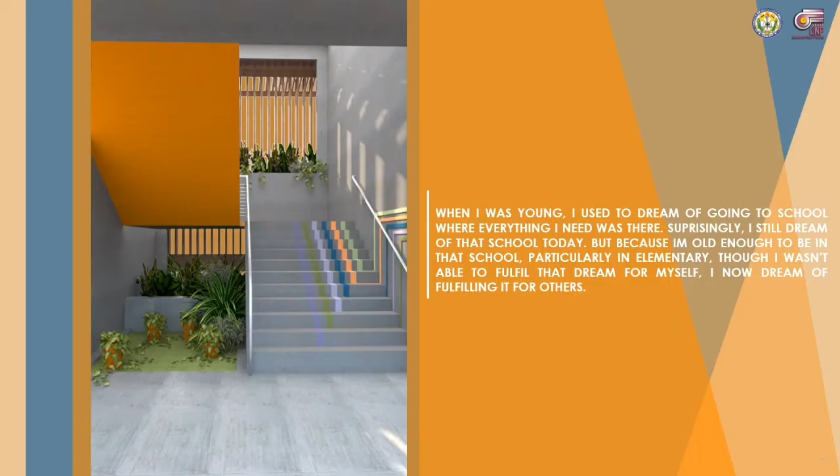When I was young, I used to dream of going to school where everything I need was there. Surprisingly, I still dream of that school today. But because I'm old enough to be in that school, particularly elementary, though I wasn't able to fulfill the dream for myself, I now dream of fulfilling it for others.

These days, it is very alarming to hear a kid saying that he doesn't want to go to school anymore. Maybe the kid has a bad experience of going to school, or maybe he doesn't want the school itself because of its poor design. This is where design consideration must be applied, because building structures has a great impact on its users.

The problem is, the municipality of Santa Maria together with the principal head of the DepEd Santa Maria have given us their concerns about the design of elementary schools in the said town. One of which is that none of the schools in the town offers a class for SPED students.

Another concern is that one of the most active and well-performing schools, the Santa Maria East Central School, will soon be relocated to a new place because the current location of the school is part of the Santa Maria Church where the Twin Chapel can be seen, which is owned by UNESCO. The UNESCO property will be renovated and reconstructed, as it will become a museum. This will be a big challenge because they will be the ones who are going to give the relocation site.

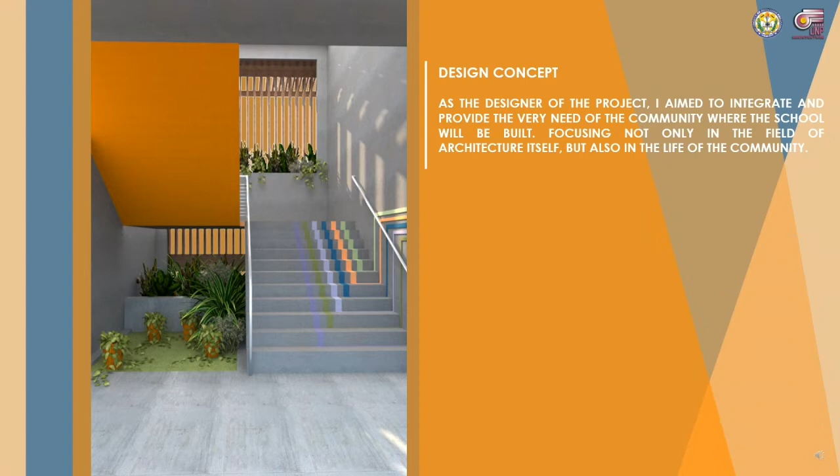class. As a designer, we should be creative and innovative, taking into consideration all the possible laws that govern the site and the future users. As a designer of the project, I aim to integrate and provide for the very needs of the community where the school will be built, focusing not only on architecture itself, but also on the life of the community.

Project objectives are well-facilitated school programs and activities, also social involvement. My design goals are to provide an idea for the future of Philippine school design, introducing the importance of farming in our community with the help of architectural solutions.

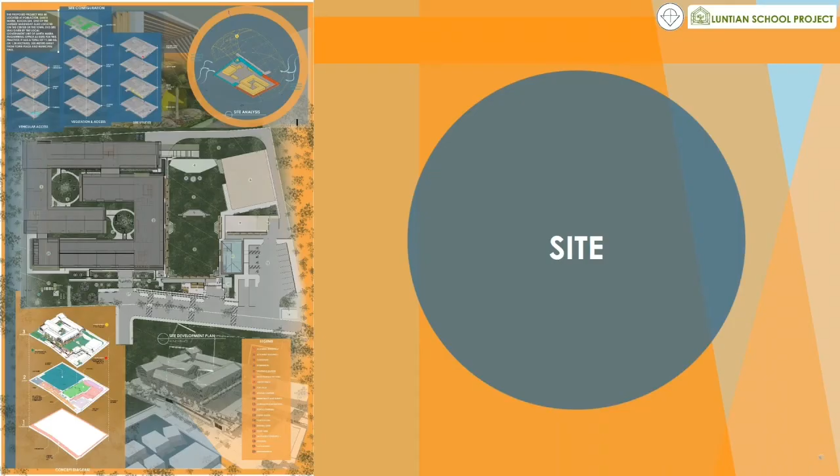Project Site. Let's start from understanding the site through site analysis. This shows the site analysis in isometric form, massing and prevailing winds. The northeast and southwest monsoon are also presented on the board.

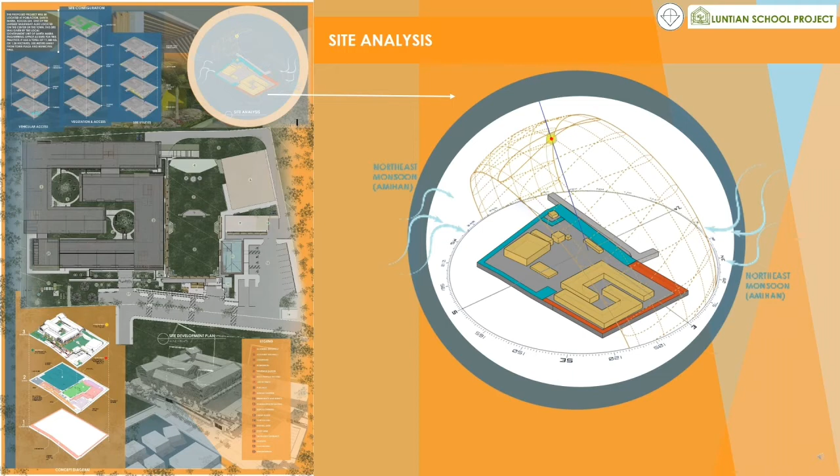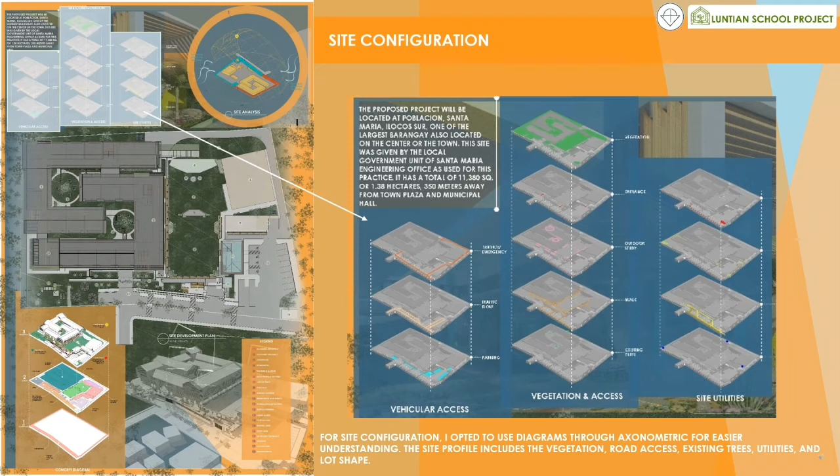Next we have the site configurations. I opted to use diagrams through axonometric for easier understanding. These show the site behavior and their properties such as the traffic flow, the existing and future vegetation, project utilities and lot shape, etc. And next we have the concept diagram for the site.

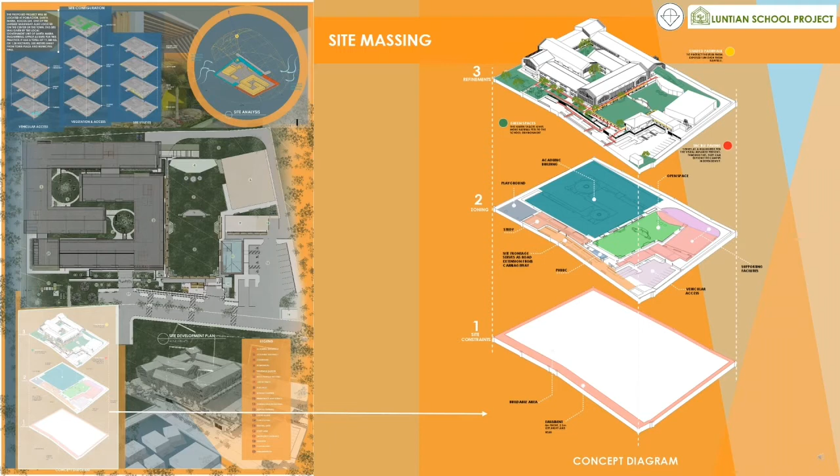First, it shows the site easements. Next, we have the zoning related to every activity of the project. And last, we have the massing diagram together with other users' considerations.

And now, let's discuss a bit of the site development plan. You may check the attached PDF file for a more detailed view.

We have the school entrance. Behind it is the waiting area for students and parents. The flagpole area as the center of the project, and the administration building. Then we have other school facilities: playground, kiosk, and study park.

And especially we have the academic buildings. In the middle of it is a courtyard that serves as the center part for both buildings. And lastly, we have the farm to school garden.

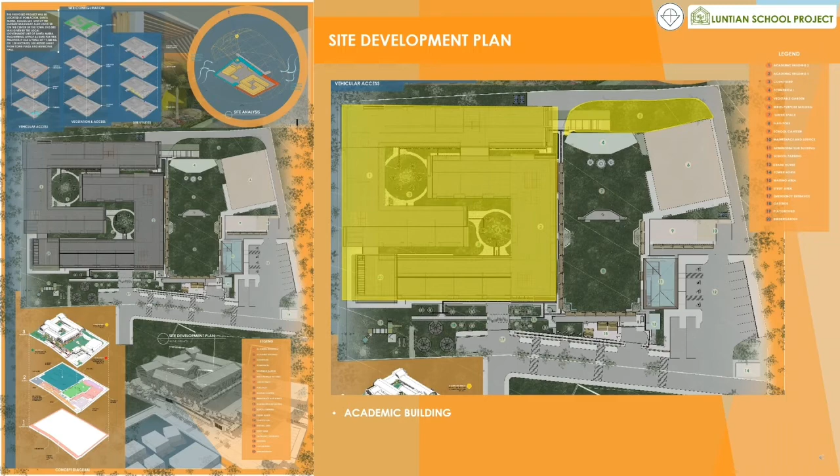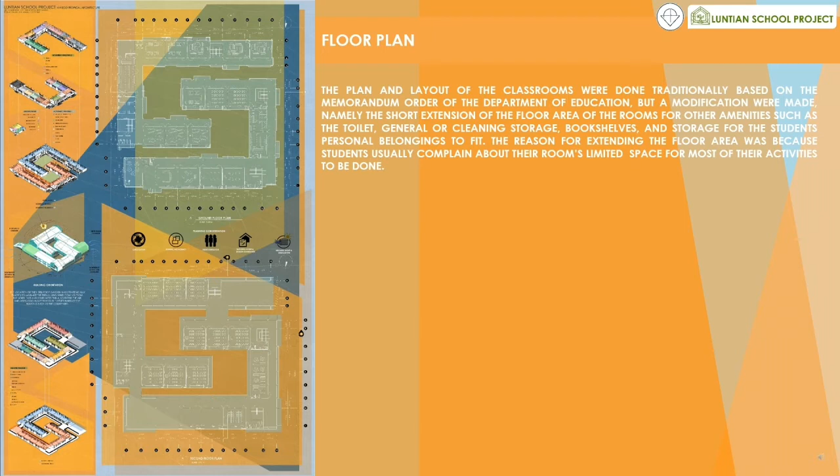Floor plan. The plan and layout of the classrooms were done traditionally based on the memorandum order of the Department of Education, but modifications were made, namely the short extension of the floor area of the rooms for other amenities such as the toilet, general or cleaning storage, bookshelves, and storage for the students' personal belongings to fit. The reason for extending the floor area was because students usually complained about their rooms' limited space for most of their activities to be done.

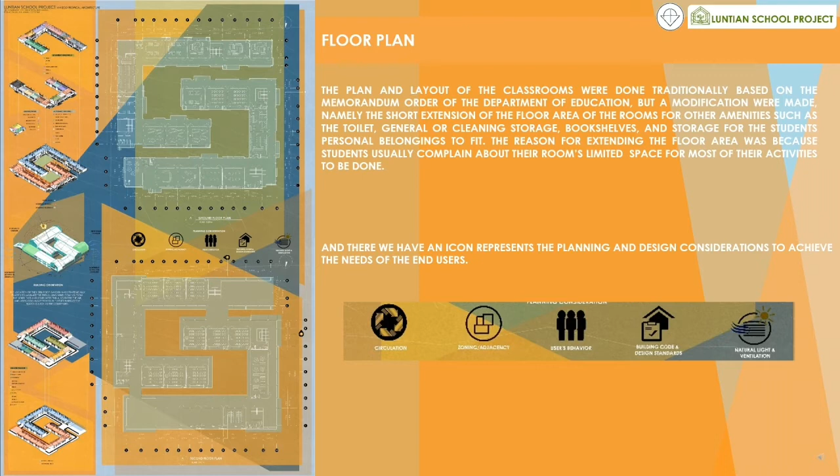And there we have an icon that represents the planning and design considerations to achieve the needs of the end users. And this is the ground floor plan. We can check the labels by referring to this axonometric diagram. This kind of diagram was made for all the parts to be shown in a more detailed presentation.

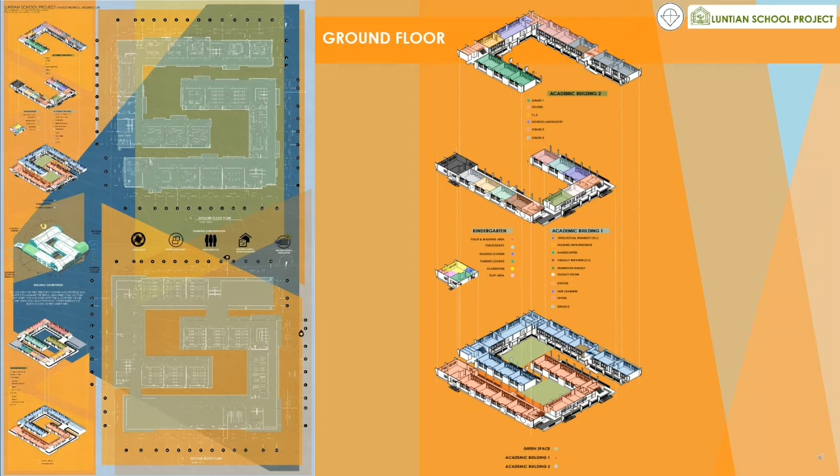The building comprises mainly of the rooms for special education, and the second building is composed of lower grade levels from first grade to third grade.

And here in the second floor, the first building mainly comprises of the learning resource subjects like computer lab, music and art room, library, etc. The second building is composed of higher grade levels from 4th grade to 6th grade.

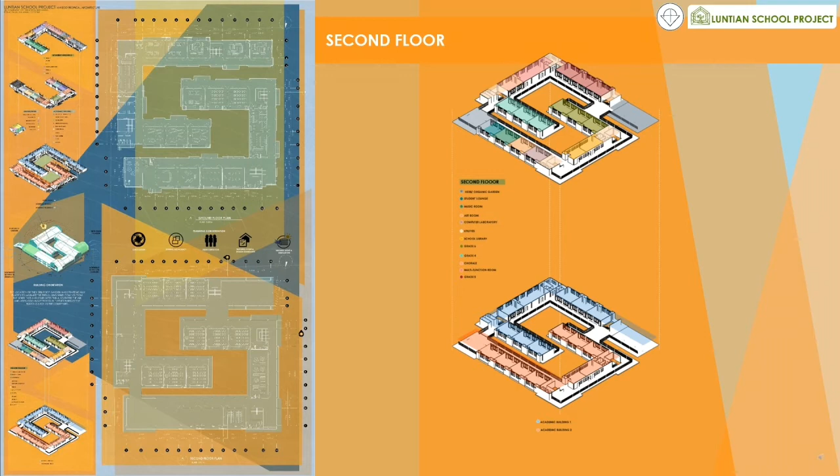Building orientation. As pointed before, the building orientation was strongly considered to attain the tropical approach on planning. The both ends have a hydroponic garden or vegetable garden. The roof gardens were strategically placed for the prevailing winds to give natural cool wind inside the building.

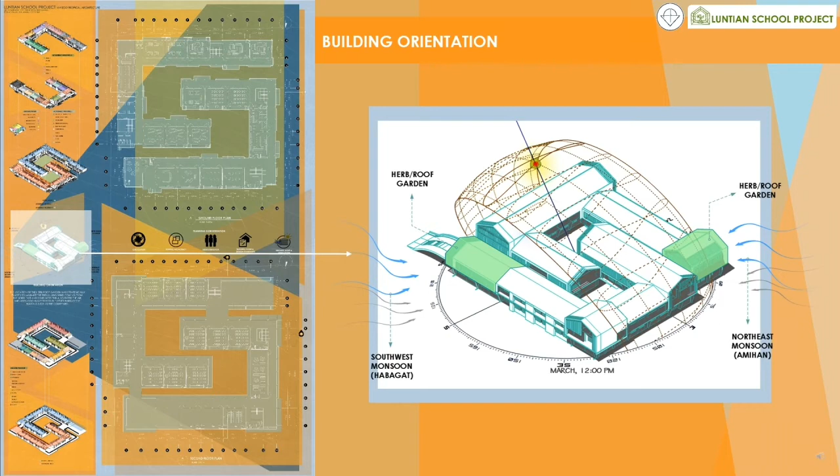Exterior design. And here are some of the design considerations. Zoning and adjacency: studying the different uses and behavior of every spatial requirement for smooth flow. Social involvement: educational and other recreational spaces must be adjacent and easy to access by the users.

Landscape: incorporating the design with landscape architecture makes a big difference than dull surroundings. Play: the project also needs a place for entertainment and social interaction outside the classroom. Sustainability seeks to minimize the negative environmental impact of the building through use of material, energy, and water.

Cultural character: the design is better if there is something to attract the possible users, also to promote the native design of Filipino architecture. Innovative design should be present not only in the form of ecological, but also to give good comfortability and satisfaction to the users. Environmental design.

The project uses agriculture as an ecological and economical solution to the area. Also uses alternative landscape architecture in the project. And last, natural sunlight and ventilation, lessening the use of energy, a natural factor approach for the project as a tropical design solution.

The colors that I use are specifically chosen because colors greatly impact the environment of the school and the students, physically and psychologically.

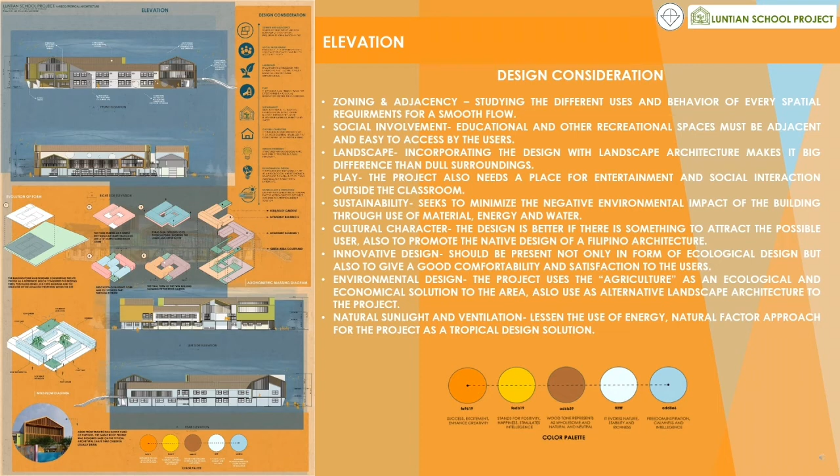As a whole, we can see that the design evolved from the Filipinos' traditional house, the bahay kubo or nipa hut, which most Filipinos have experienced living in. The traditional house is also among the well-known houses designed in the Philippines.

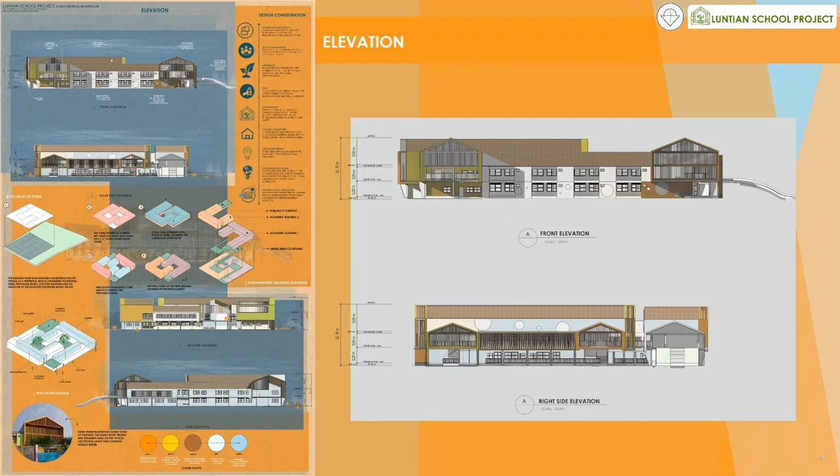Evolution of form. The evolution of form and building massing shows the reason behind the building shape and design. It was designed that way because of the environmental approach to the site. Aside from the traditional bahay kubo of Filipinos, the gable roof profile was designed based on a typical archetypal shape that children usually draw.

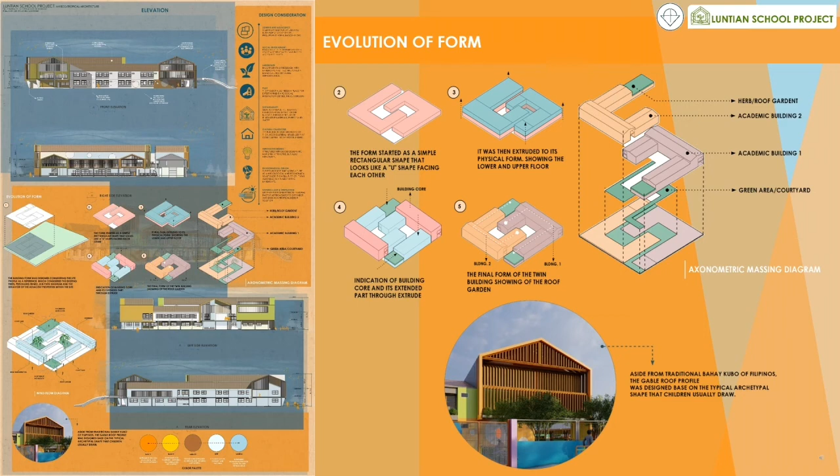And this is the wind flow diagram, an academic building and the courtyard in the middle as a central park. In sectional detail, the angle was discussed for the three seasons of the Philippines. This part must be carefully considered for the design approach on tropical solutions to be applied.

Some of the solutions include the building envelope that was represented by a louver design, courtyard, a wide corridor, and a high-pitched roof.